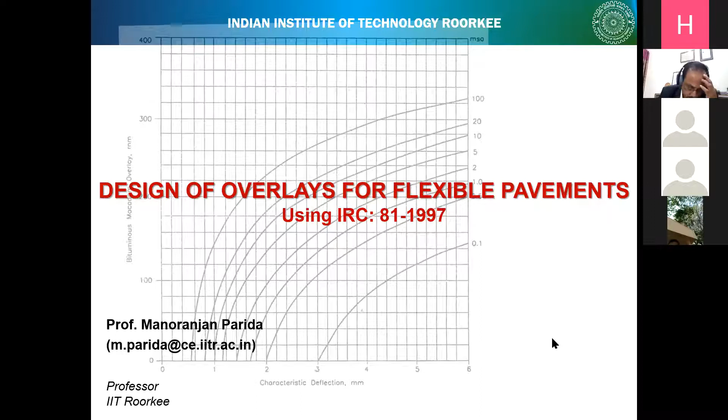The title of this presentation is Design of Overlays for Flexible Pavements, using IRC 81 1997. This is also known as the Benkelman beam deflection test. Other than Benkelman beam, you can use a falling weight deflectometer, but my lecture is not going to cover that - I'm just going to cover the Benkelman beam deflection based overlay design. I have one small case study from Noida, a project where the basic emphasis was on a BBD test. I'll be explaining the details of that particular case study.

Maybe in the audience you are already familiar with this particular nomogram or chart. In the IRC document, you can see these nomograms, and they were very useful before the computer was in use, before the mobile was used. It's a very simplistic representation and a very handy tool for field engineers.

This one is primarily the overlay thickness design curve, which is there in IRC 81 1997. Here you can see, let me explain - on the x-axis you have characteristic deflection, the unit is in millimeter, and you have different curves. These different curves correspond to different million standard axles.

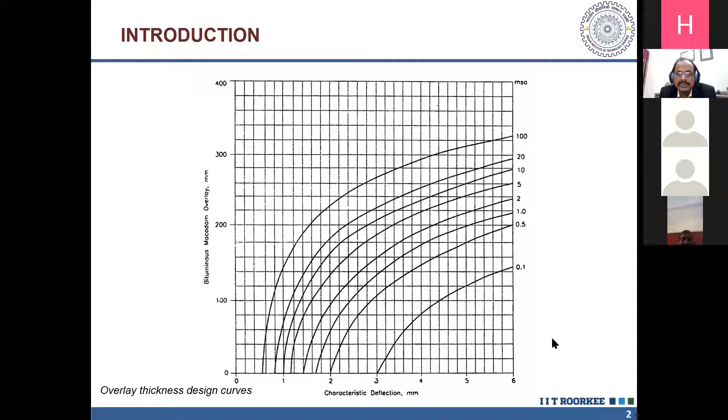The first curve at the lowest portion is for a standard million axle of 0.1, and the last one is for 100 MSA, 100 million standard axles. The most critical part is the y-axis, which is the outcome of the entire exercise.

It is the bituminous macadam overlay in millimeter. All our bituminous roads or any kind of road network will require periodic maintenance. After a certain period of time, depending on their structural health, there is a need for strengthening. Especially for bituminous pavements, the strengthening is determined on the basis of their current strength, using pavement evaluation techniques. Benkelman beam deflection is a very simplified technique, and in this curve you get the characteristic deflection from the Benkelman beam deflection test.

Million standard axles are calculated on the basis of traffic data and axle load spectrum. Finally, what the field engineer is interested in is the thickness of overlay. The output here is available in terms of bituminous macadam, although in real life it could be DBM or STBC, so it has to be converted into equivalent layers of wearing course, for which the conversion is available in this particular code.

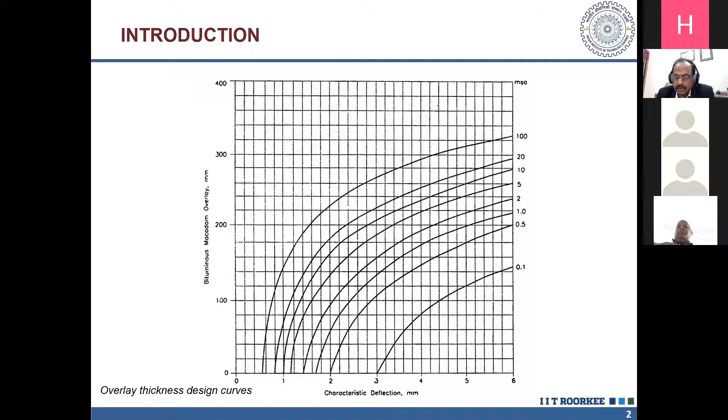So that is briefly what we do in the process of the design of overlays using IRC 81.

If this represents the different layers of your flexible pavement, you start with the subgrade, then an existing pavement, and depending on its functional and structural condition, it will require some sort of overlay. Right now we are looking at the Benkelman beam deflection test and how we can determine the quantum of overlay.

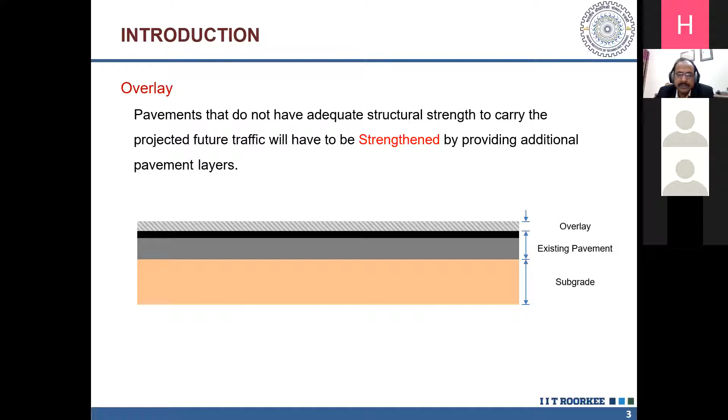In fact, the method provides the optimal requirement. Many city authorities would like to make a provision for the next 5 years, some for the next 10 years. Especially in the case of Delhi, the major overlays were done in 2010 to 2012, immediately after the Commonwealth Games. Currently, almost after 8 years, they are again looking at understanding the current condition of the pavement, resorting to this Benkelman beam deflection test, and on that basis determining what overlay needs to be provided on these flexible, bituminous pavements.

This is the document IRC 81 1997. Many of you must be familiar with this particular document, guidelines for strengthening of flexible road pavements using the Benkelman beam deflection technique. If you are following any textbook, the book by Professor Khanna, Justo, and Professor Veeraraghavan has a chapter on the design of overlays for flexible pavement, which is largely confined to this IRC 81 1997.

Especially if you are designing a flexible pavement, IRC 37 2018 is relevant. As part of this faculty development program under this AICTE Training and Learning Academy, you have attended many lectures, and I think there must have been reference to IRC 37, which is used for the design of flexible pavement.

You have another IRC code, IRC 115, the guidelines for structural evaluation and strengthening of flexible road pavement using a falling weight deflectometer, which is also in practice, although FWD is quite popular for evaluation of airfield pavements.

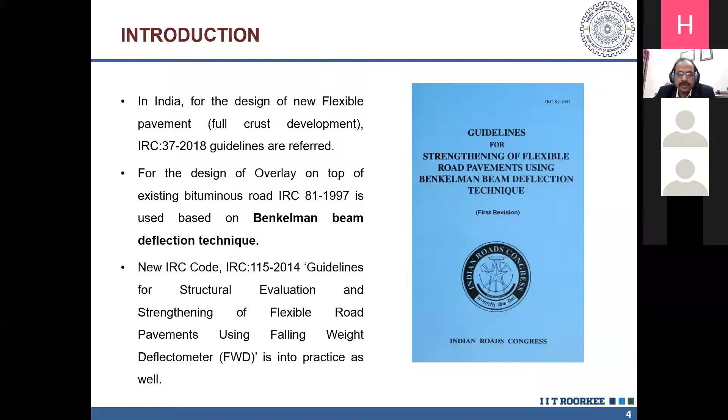In FWD, you have two variants: one is a lightweight falling weight deflectometer, and the other is vehicle mounted. The lightweight falling weight deflectometer is portable, you can carry it and move from one place to another. There have been instances of usage of both, but currently FWD is seen more and more, especially for high volume networks like 4-lane, 6-lane divided national highway networks and expressways. Slowly, people are moving towards falling weight deflectometer based pavement evaluation and design of overlays.

While you design these overlays, these are the basic steps. First, you need to select a design period, I'll come back to this later. Then you need to project the commercial traffic, that is the number of commercial vehicles per day for the design period. Then you have to estimate cumulative standard axle load repetitions for the design period, which could be 5 years or 10 years.

Depending on the design period, you need to project your traffic and convert it into million standard axles, which is possible on the basis of an axle load spectrum study. This particular term is known as NS, and many of us might be familiar with the term MSA, million standard axles. Then there's selection of characteristic rebound deflection, DC, for the existing pavement.

The DC value is obtained from the Benkelman beam test, and then you use the overlay design curve which we discussed. Once you have the NS value and the DC value, you can determine the overlay thickness requirement.

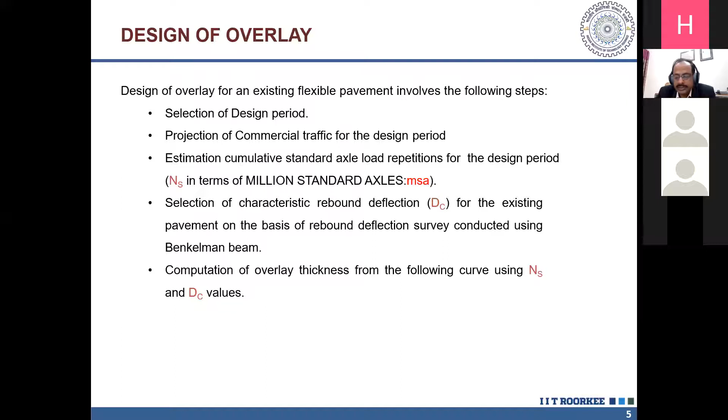This is basically a graphical presentation of design of overlays. Here there are two different verticals. The first vertical is primarily the pavement evaluation, involving field surveys using Benkelman beam apparatus for deflection measurement. The testing protocol is defined in IRC 81 1997.

You have to compute the rebound deflection, this is capital D in millimeter. Then depending on the temperature of measurement, you apply the temperature correction, depending on rainfall and soil conditions you apply the seasonal variation correction. On the left side, you go through the pavement evaluation and the outcome is the DC, the characteristic deflection.

On the right hand side, the basic effort is towards calculating the cumulative standard axle load, NS, most popularly known as MSA. The unit of NS is a million standard axle.

First you need to choose a period of traffic for the design period. It's a matter of economy, a matter of funds available with the particular agency. Some city roads would like to go for 5 years, some would like to go for 10 years.

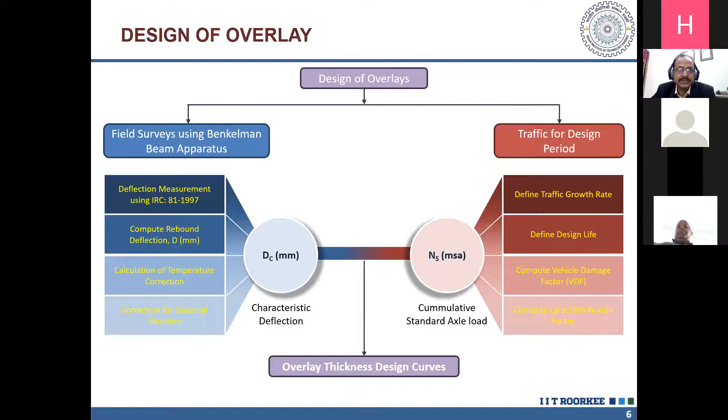So here are some more estimations, some details of the traffic parameters. The projection here is going to be of the commercial vehicle, and commercial vehicle is defined as that particular vehicle which has a laden weight of 3 tons or more.

Then the traffic is considered in both directions in case of 2-lane roads, and in the direction of heavier traffic in case of multi-lane divided facilities. For urban roads, a 3 day count is sufficient. Normally you go for 3 days weekday traffic count and take its average, or generate the commercial vehicles per day for the 3 days average.

For non-urban national highways and expressways, you need to go for a 7 days, 24 hours classified count. From that, the design parameter which is extracted is commercial vehicles per day.

Coming back to traffic growth rate, for a regional network, traffic growth rate is straightforward. But for urban roads, what is going to be the traffic growth rate is a big question, because for a limited overlay study, it's not possible to carry out simulation or undertake any 4-stage comprehensive traffic transport planning. If you have some past data or past trend, that is going to be useful. But invariably for urban road networks, it's very difficult to have access to past disaggregate traffic data on the basis of which it's possible to make projections.

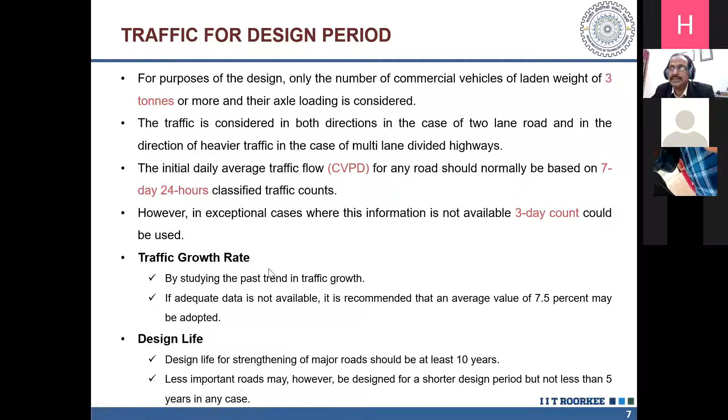Then a small comment on design life. As I suggested, it's a good idea, especially when developing a maintenance study, to develop two perspectives: projections for 5 years and projections for 10 years. Depending on the budget and availability of funds, the particular agency can decide which is the best way to go.

Now, for the calculation of vehicle damage factor, you need axle load data - the weight of all the individual axles of the commercial vehicle. The damaging effect is governed by the fourth power law: actual weight of the axle divided by standard weight of the axle, to the power 4. So this fourth power law governs the calculation of vehicle damage factor.

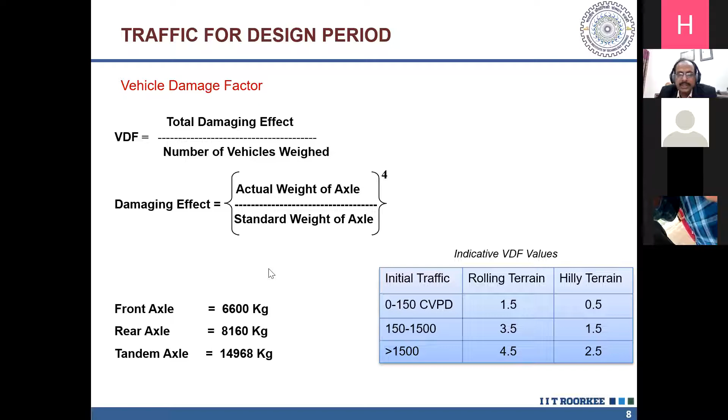Depending on the initial traffic value, the VDF values are available in IRC 81, depending on the different ranges of commercial vehicles per day. The initial range is 0 to 150 CVPD, then next is 150 to 1500, and more than 1500. These values are available in IRC 81. So if you are not doing any axle load spectrum study, you can use these default values available in the IRC code.

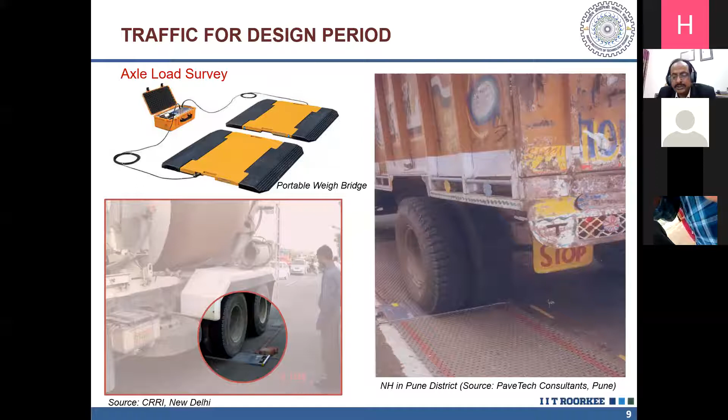I have taken these pictures from Central Road Research Institute. CRRI has been very active with respect to different pavement evaluation technique studies, and they also undertake a lot of axle load spectrum studies. On the right hand side, you can see the study going on in a National Highway in Pune district - this one is from PaveTech Consultants, Pune.

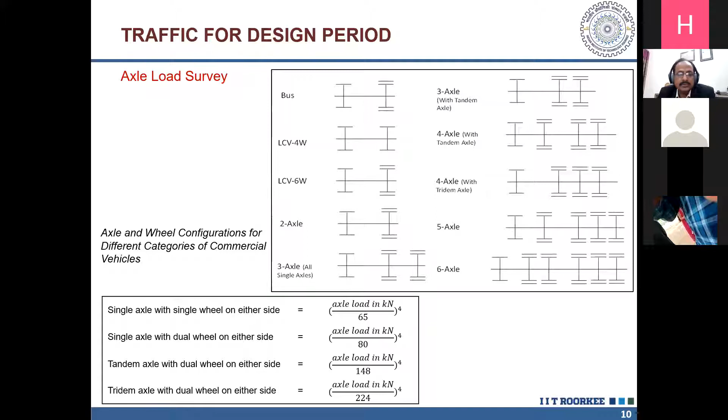Then these could be different possible configurations of the axle loads for different kinds of vehicles. How do you calculate this? It will all depend on what is the permissible axle load, and on the basis of that, the vehicle damage factors can be calculated.

One very important traffic parameter for these overlay design studies is the lane distribution factor. The lane distribution factor depends on what kind of road it is - single lane road, 2-lane single carriageway road, 4-lane single carriageway road, and dual carriageway roads. For all these, the lane distribution factors are available, which go into the calculation of million standard axles.

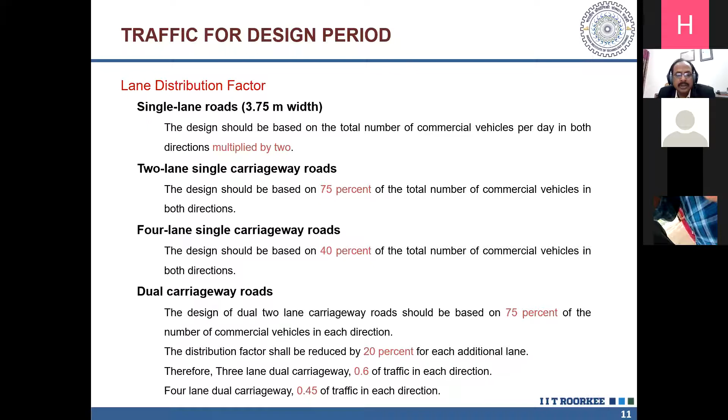Now, NS, the design traffic for the design year, is calculated in this way, which is very similar to the calculation with respect to NS in IRC 37. So NS is the cumulative standard axles to be catered for in the design. Here, capital A is the initial traffic after completion of construction, in terms of commercial vehicles per day.

So it takes into account all the commercial vehicles. It excludes definitely cars and other non-commercial vehicles. So R is equal to annual growth rate of commercial traffic for that particular stretch of the road or for the particular area where you are going to undertake this study. N is equal to the design life in years.

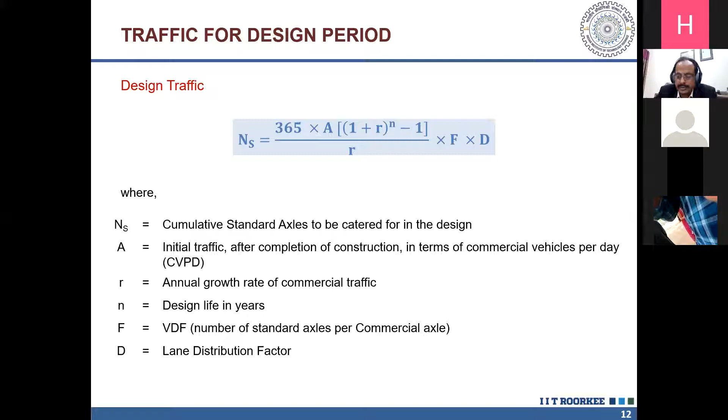There are options that normally either you can do it for 5 years or 10 years. Capital F is the vehicle damage factor. If you have an axle load spectrum study, from that you can actually calculate F, or otherwise you can take the default value of F from the IRC 81. Capital D is the lane distribution factor, so depending on the geometry or configuration of the particular network, you can use the value of D.

Now we look at IRC 81 1997, which defines the test procedure. Basically it's known as pavement condition survey. This survey usually precedes the actual deflection measurement, which consists primarily of visual observations and rut depth measurement. You have a straight edge by which you can measure the rut depth. Based on these, the road length shall be classified into sections of equal performance, preferably of minimum 1 kilometer length section. So the entire study network has to be divided into homogeneous sections.

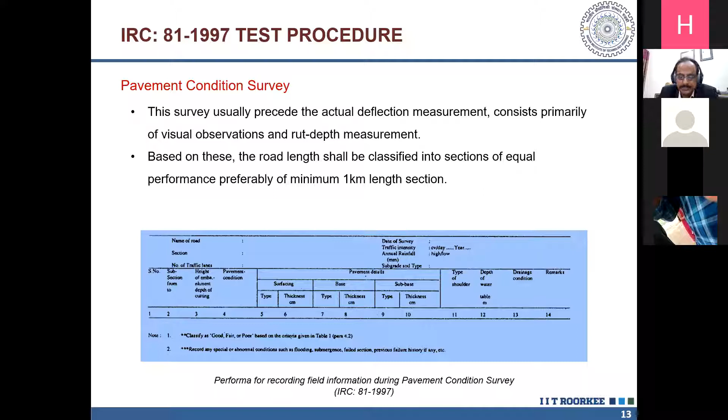So now Benkelman beam as an equipment, the different geometry and all these details are provided. And normally if you're purchasing a Benkelman beam, you get a standard Benkelman beam with all the above geometry. Then the particular truck, in fact, you require a loaded truck for a Benkelman beam. So the rear axle load is going to be 8170 kg, and you need to maintain a tire pressure of 5.6 kg per centimeter square.

In terms of tolerance, for the load you have plus or minus 1%, and tire pressure plus or minus 5%. So you need to also have a tire pressure measuring device and a thermometer which can measure the pavement temperature 0 to 100 degrees centigrade. You need a mandrel for making a hole in the pavement to measure temperature, and you need to reach a depth of 4.5 centimeter. The top dia is 1.25 centimeter and bottom dia is 1 centimeter. You apply glycerin, and through glycerin you can measure the temperature of the pavement. So this is essentially for applying the temperature correction.

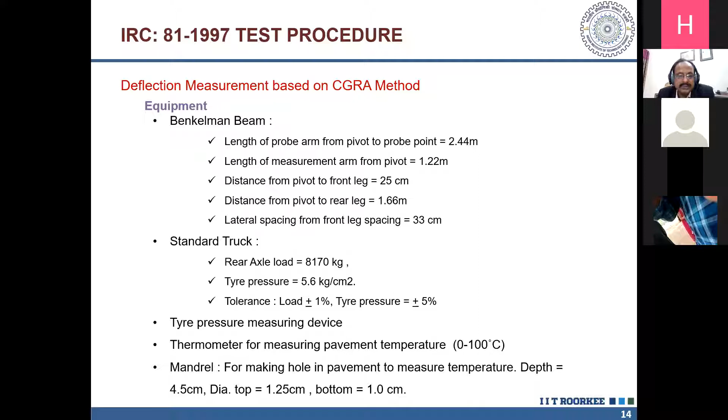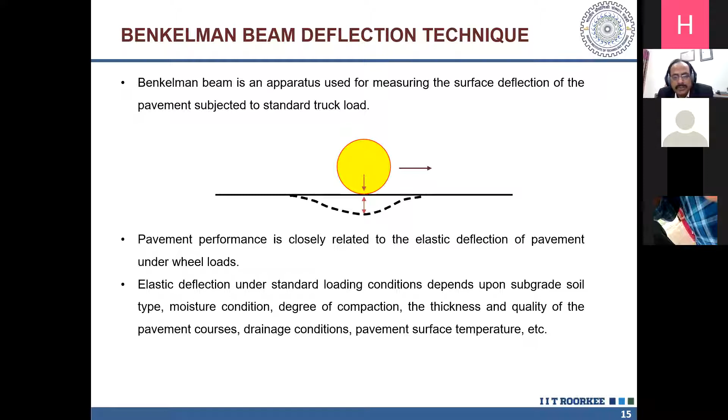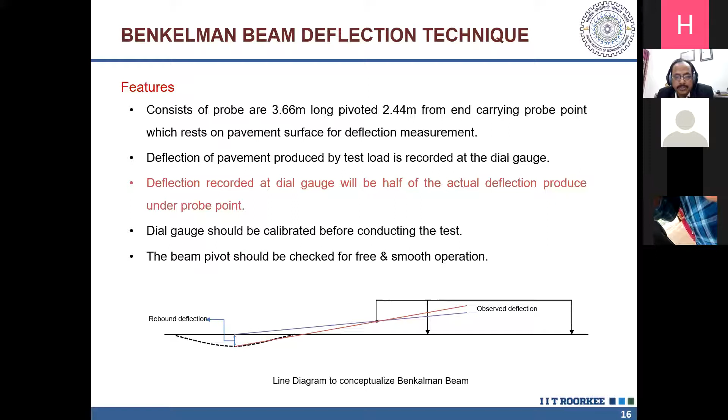The Benkelman beam apparatus is used for measuring the surface deflection. You have a loaded truck and you will be placing the beam behind the loaded truck. We believe that because of the loaded truck, because of the axle, there is going to be a deflection, and once the truck moves away, the pavement is going to bounce back. So in this Benkelman beam, you are going to measure 3 sets of readings, which are essentially the rebound deflections.

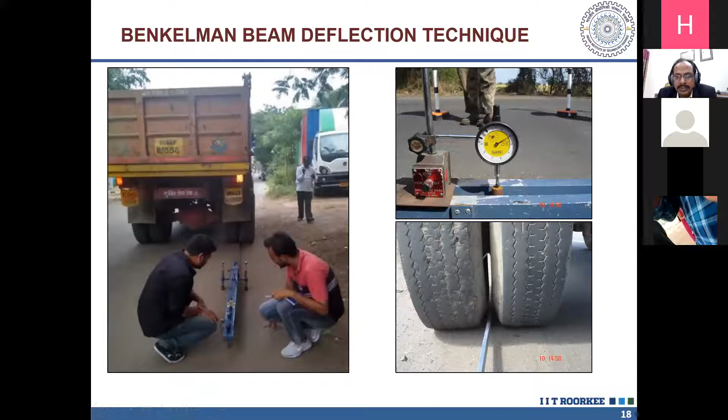Now these are a couple of photographs showing how the Benkelman beam is placed between a pair of tires. Here you can see the probe of the Benkelman beam, which is inserted between a pair of tires.

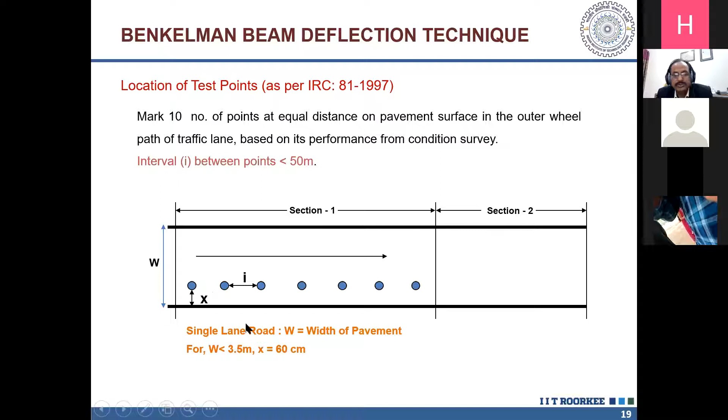So one aspect is how to mark these points in the longitudinal direction. The other is the location of these test points from the edge. Here, capital W is the width of the carriageway, and X is the location of the point with respect to the outer edge. If it's a single lane road, X is equal to 60 centimeters. Depending on the lane configuration, the value of X will change.

For a 2-lane road with W more than 3.5 meters, X is equal to 90 centimeters. These points in the longitudinal direction will have a lateral separation of 90 centimeters from the edge of the pavement.

For a 4-lane divided road, the location of these points is X equal to 150 centimeters. Looking at the diagram, it's a 4-lane divided facility, and you can see that these test points in the two adjoining lanes are staggered - they do not fall in one line. The point in the inner lane is exactly at the center with respect to the two consecutive points in the outer lane. So these test points need to be located in a very staggered manner if it's a divided facility.

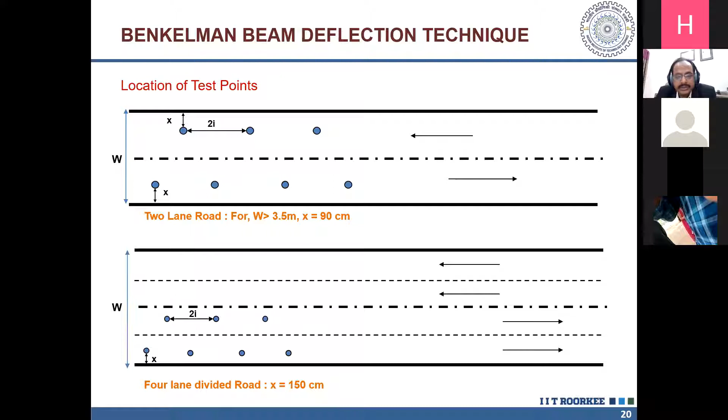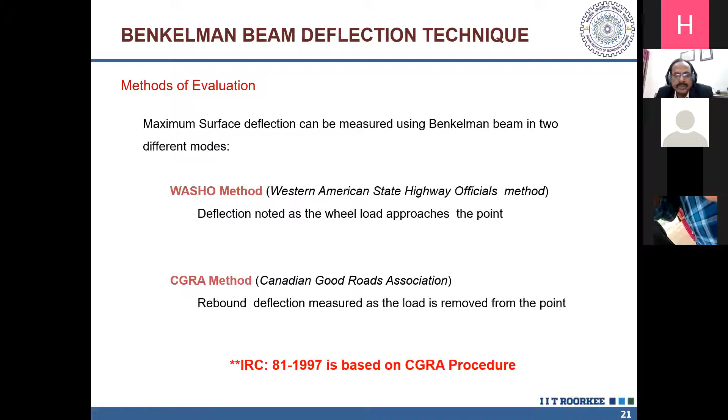There are two methods of pavement evaluation with respect to design of overlays. One is the WASHO method - Western Association of State Highway Officials method. The other is the CGRA method - Canadian Good Roads Association method - and IRC 81 has adopted the CGRA procedure.

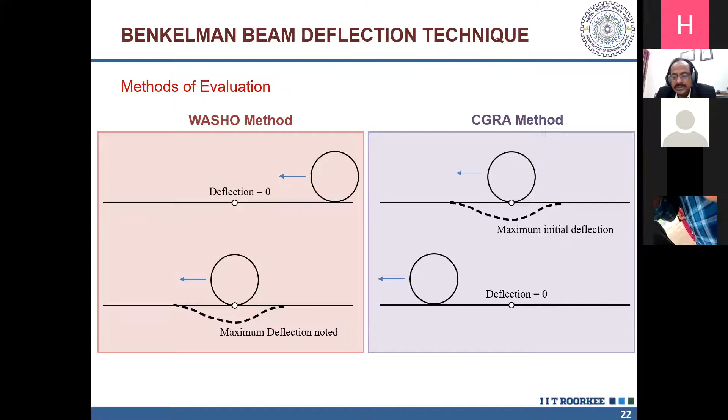In both methods, what differs is the movement of the trucks. In the CGRA method adopted by IRC, the truck moves ahead and you take 3 readings. First, over the test point with the rear wheel, that is the initial deflection. Then the truck moves a distance of 2.7 meters from the initial position - that's the second reading. Then it moves 9 meters away from the original position - that's the final deflection. So you have 3 sets of deflection, and by using these, one calculates the characteristic deflection.

As a procedure, it is very clearly documented. The point on the pavement to be tested is selected and marked as discussed previously. It is very important how you pick these test locations - whether it's a divided facility, an undivided facility, single lane, or 2-lane road. IRC 81 provides the details for marking these test points.

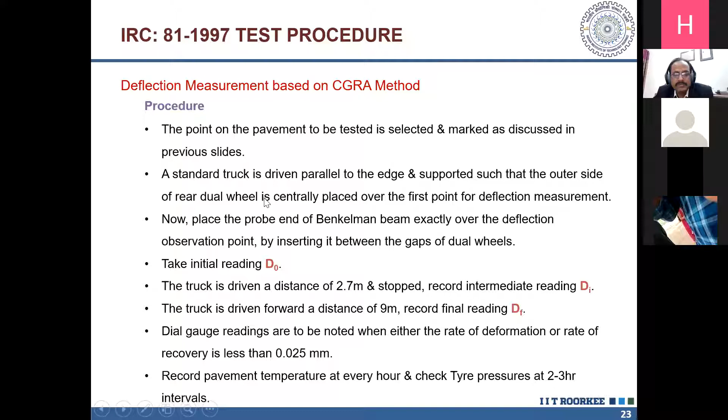Then you need to bring a standard truck, which is driven parallel to the edge and positioned such that the outer side of the rear dual wheel is centrally placed over the first point for deflection measurement. You get 3 sets of deflection: initial is D0, and once the truck is driven a distance of 2.7 meters, you get reading DI, and after it has moved 9 meters, you get the final reading DF. These are obtained from the dial gauge. You also need to record pavement temperature every hour and check tire pressure at 2 to 3 hour intervals.

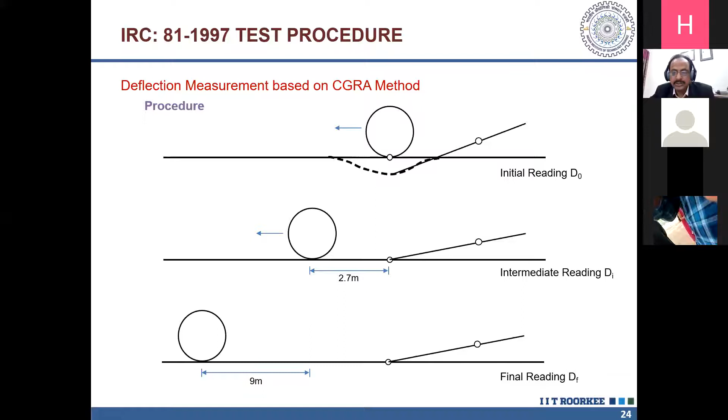So this is basically a schematic representation. You can see the first configuration is with respect to initial reading D0. Once the rear wheel has moved a distance of 2.7 meter away from the original position, you get intermediate reading DI, and after this rear wheel has moved a distance of say next 9 meters, you get the final reading of DF. So these three deflection values are going to be useful for calculating the characteristic deflection.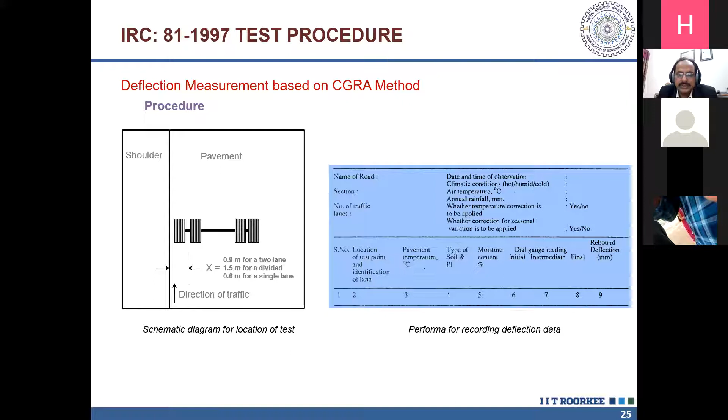Now these are the calculations on the basis of Canadian Good Roads Association method. First you check the difference between DF minus DI - that's the difference between the final deflection and the initial deflection. So the first condition: if DF minus DI is less than or equal to 0.025 mm, then the rebound deflection is calculated in this way - Capital D is equal to twice DF minus D0.

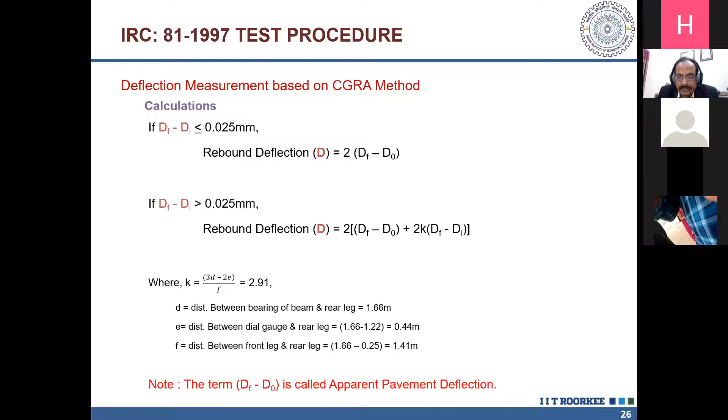If DF minus DI is greater than 0.025, you calculate the rebound deflection by the second equation, where you have one more parameter, K. K is equal to 2.91. It essentially depends on the geometric configuration of the Benkelman beam, which is used with the standardized Benkelman beam recommended in IRC 81. K is equal to 2.91. And this term DF minus D0 is the apparent pavement deflection.

Now, correction for temperature variation. The default temperature is 35 degrees centigrade, and anything over or less than this requires temperature correction. So if the deflection measurements are taken at any temperature other than 35 degrees centigrade, the deflection values are corrected using a correction factor of 0.01 millimeter per degree centigrade. The correction is positive for pavement temperature lower than 35 degrees and negative for pavement temperature higher than 35 degrees. Like here, if your recorded temperature is 37 degrees, the correction is going to be negative in this case: 35 minus 37 into 0.01, that is minus 0.02 mm.

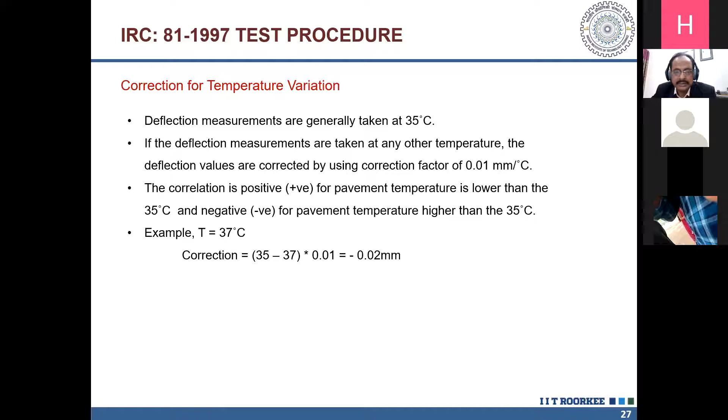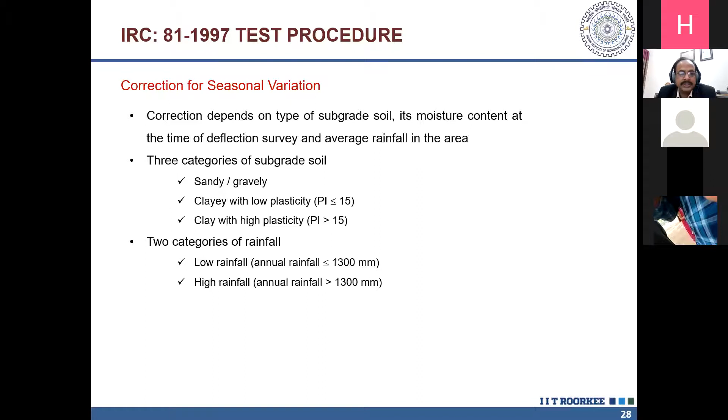Then you have corrections for seasonal variation. You need to identify the type of subgrade soil - there are three categories of soils - and the type of rainfall data. On the basis of that, you have these six charts given in IRC 81 for the seasonal variation.

Now you'll calculate the characteristic deflection. So here you can see that you have calculated D, the rebound deflection, apply the temperature correction, which is plus or minus, and the seasonal correction factor, which is in a multiplicative format. That gives you the corrected deflection value.

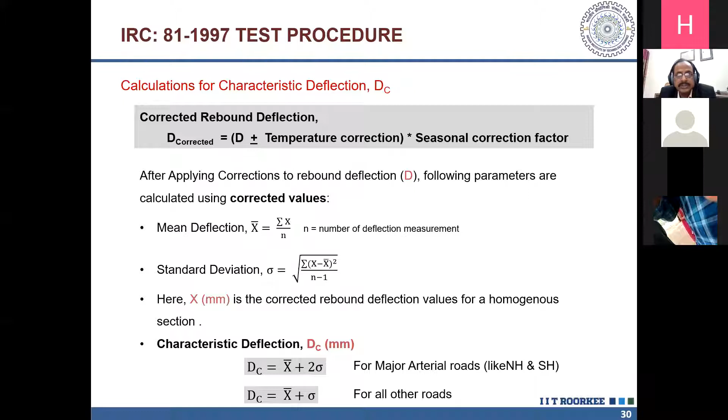Now you need to carry out very simple statistics. You find out the mean deflection, you find out the standard deviation, and then using the mean and standard deviation, it's possible to find the characteristic deflection DC. So characteristic deflection DC is equal to mean plus twice sigma for major arterial roads like National Highways and SH, and characteristic deflection is mean plus 1 standard deviation for all other roads.

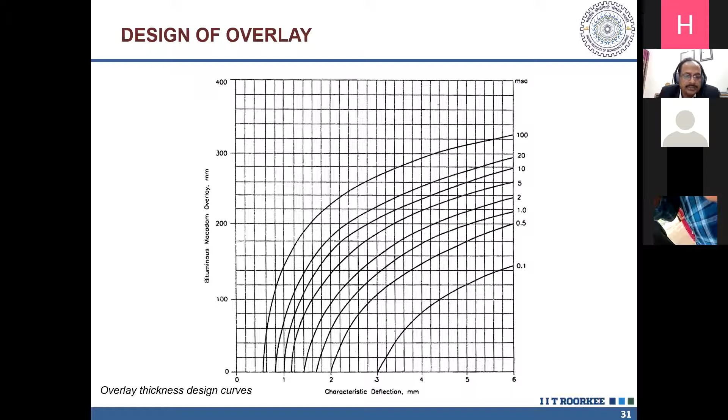So that's how we are again back to this particular overlay design curve, and you can find out the characteristic deflection, which is an input on the x-axis. Then you have calculated MSA, the million standard axles. With this, it is possible to determine the thickness of the overlays in terms of BM layer in millimeter.

So this is the finishing point of design of the overlays. This particular chart, as I said, these design charts are very, very handy with field engineers. They are also known as nomograms. And as I said before, you had the mobile apps or simple devices, but these charts were the most elementary devices and very handy for field professionals.

Then like in real life, your top layer is not going to be in terms of bituminous macadam. It could be like SDC, semi-dense concrete. It could be DBM, it could be asphaltic concrete. So then we need to go in terms of equivalence of different layer materials. Here you can see that 1 centimeter of BM is equal to 1.5 centimeter of WBM or WMM or BUSG. Then 1 centimeter of BM in terms of the surface layer is 0.7 centimeter of DBM or asphaltic concrete or semi-dense concrete. So it is possible to convert the BM into the desired layer through which you would like to undertake the overlays.

And the recommended minimum thickness of overlay is equal to 50 mm BM with additional surfacing course of 50 mm DBM or 40 mm BC.

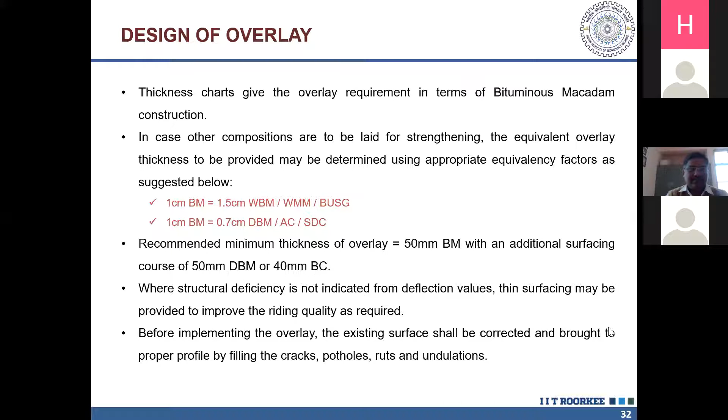Now I'll move to the next part. Okay, so I hope you can see my screen. Is my screen visible? Slide 32. Yes, sir, yes sir, it is visible.

Okay, yeah, so the next part is basically one small example. I know it's very straightforward, not very difficult. So this is a small numerical problem. Since we have many faculty members who need to teach it in class, from that particular perspective I have tried to bring in this small numerical.

This is a 2-lane undivided national highway. Subgrade is sandy soil, and annual rainfall is less than 1300 millimeters. Existing traffic, design period, traffic growth, vehicle damage factor, then pavement temperature during deflection measurement, and then the single readings of dial gauge, all these inputs are available, and there are 11 sets of data points.

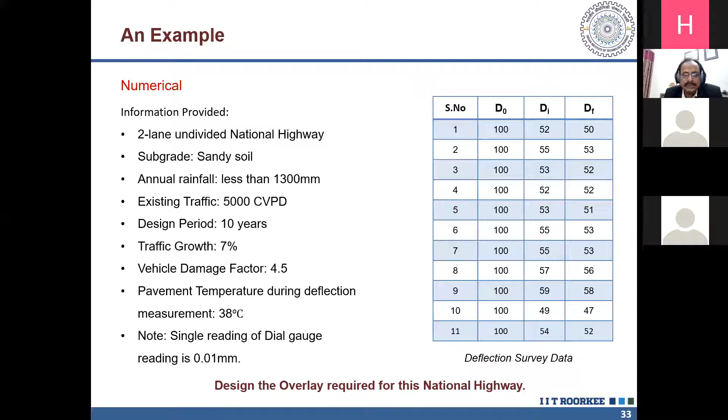D0, then intermediate deflection and final deflection - D0 is the starting deflection. So for all 11 data points, these deflections are available. Now if they are tabulated, it looks like this. So you can calculate DI minus DF, then D0 minus DF, and you can calculate the value of D.

Then you need to apply temperature correction, then seasonal correction. You have to calculate corrected deflection. Then from corrected deflection, you can calculate the mean value, standard deviation of the deflection, and then you can calculate DC. And when you calculate D, you need to check different logical checks which were given in this presentation.

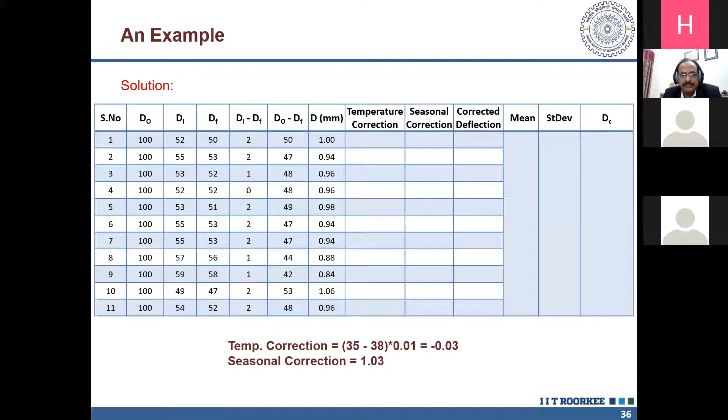So you can see the temperature corrections - because the temperature is higher, it's going to be a negative correction. Seasonal correction is going to be multiplicative, this is 1.03. And now the corrected deflection looks like this, from which you can calculate the mean value, the standard deviation, and the characteristic deflection.

In this case, being a national highway, it's going to be x-bar plus twice sigma. So it is 1.067 millimeter.

The second part is calculation of NS, cumulative number of standard axles. So all the inputs like initial commercial vehicle per day, growth rate 0.07, design life of 10 years, vehicle damage factor of 4.5, and lane distribution factor to be taken in this case is 0.75. So NS comes to be 85.1 MSA.

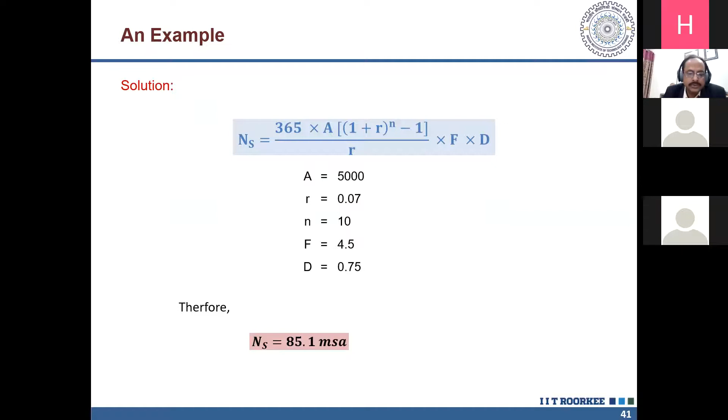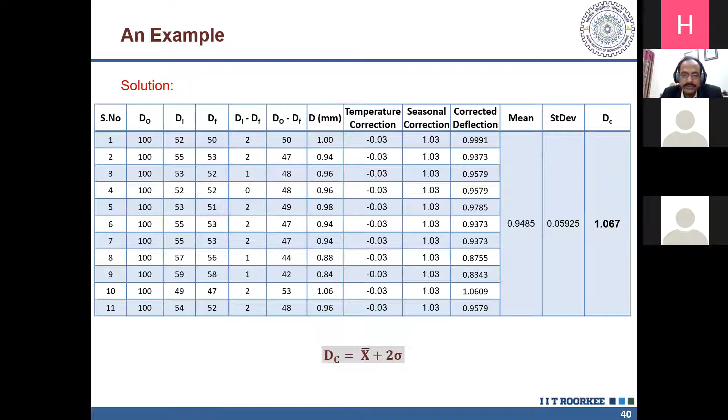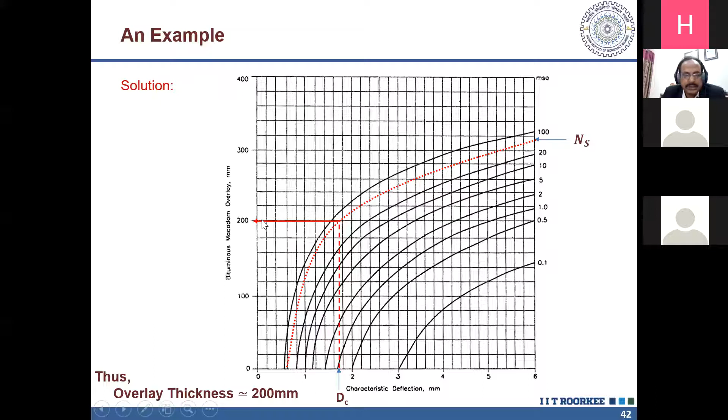So this is the value with respect to 1.067, and then you need to draw a curve because you don't have a curve corresponding to 85 MSA. So you need to interpolate the curve in between 20 and 100. On the basis of that, now you get the thickness of overlay as 200 millimeter of BM.

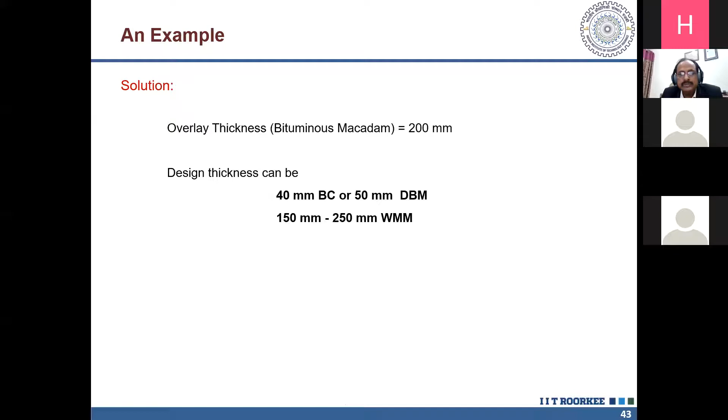So this 200 millimeter of bituminous macadam can be split into parts, like if you are providing 50 mm of DBM, 40 mm BC, or 50 mm DBM, then 150 mm to 250 mm WMM. So in terms of these two layers, this 200 mm thickness of bituminous macadam is going to be provided.

I'll be moving to the next PPT, so just allow me a little break. Sure, sir.

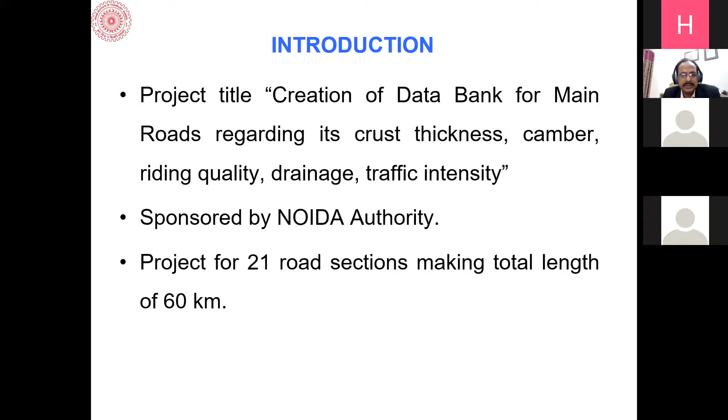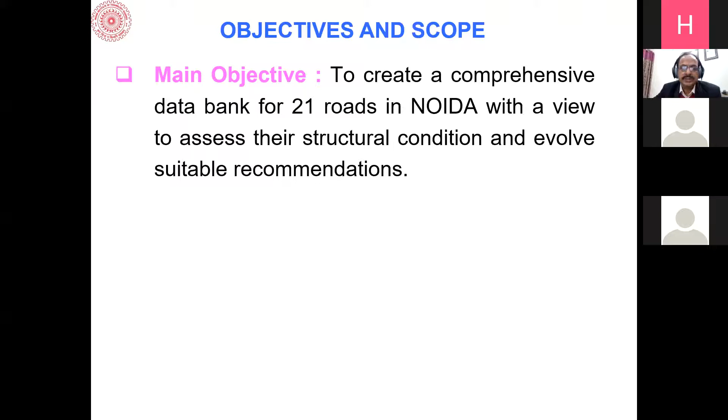So this is the title of the project: creation of a data bank for main roads regarding the pavement crust thickness, camber, riding quality, drainage, and traffic intensity. There were 21 road sections making a total length of 60 kilometers. One of the ideas was to assess the structural conditions of the pavements and make suitable recommendations.

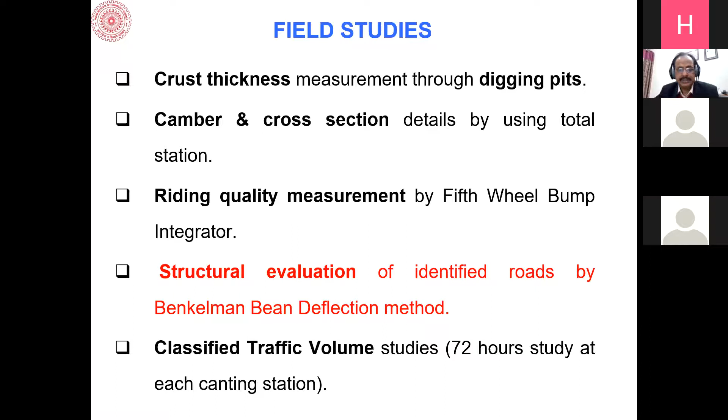The crust thickness was measured through digging pits only, making it possible to understand the configuration of different layers through these test pits. Camber and cross-section details were collected through total station, and riding quality was measured by bump integrator. Structural evaluation of these roads was carried out by Benkelman beam deflection test. Traffic volume studies were carried out for 72 hours at each of the counting locations.

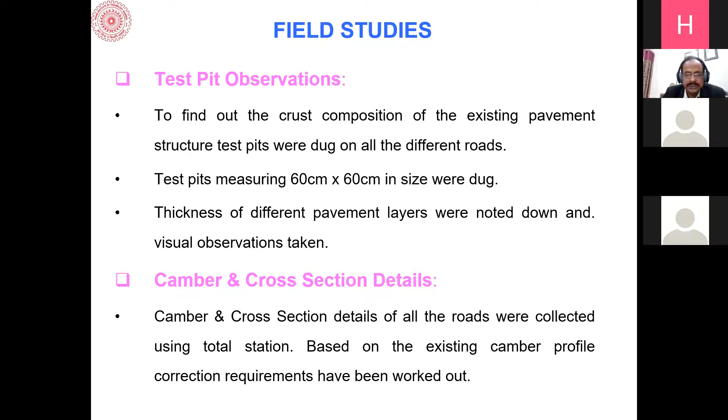Now these are the details of the test pit. The test pit is in fact very useful sometimes to understand the thickness of different layers. Camber and cross sections, as we said, were collected using total stations. You can see digging of the test pit in progress, measuring the layer thickness.

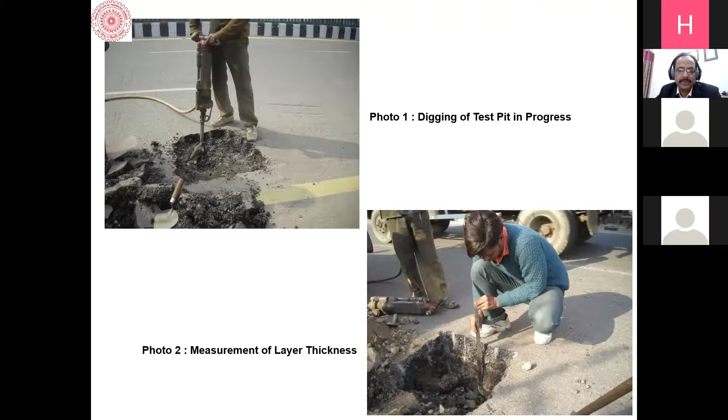In urban roads, sometimes you see that the thickness of the bituminous layer is very significant. Maybe there isn't a requirement for any additional bituminous layer, things which can be managed easily by thin surfacing, but still people would like to go for very rich bituminous layers even though there is no need for the same.

These are photographs for collection of soil samples for CBR test. Then through total stations, the study is going on.

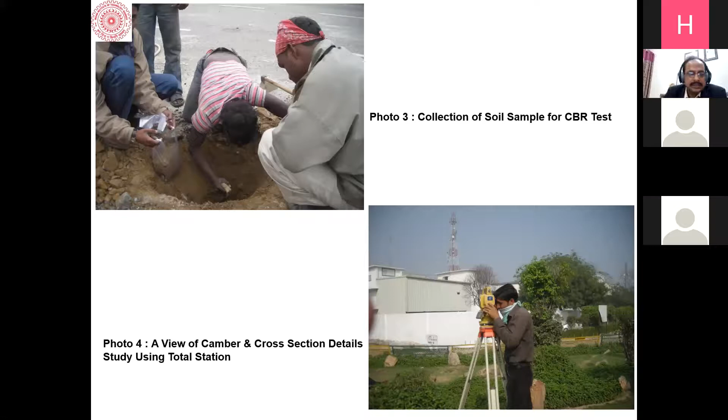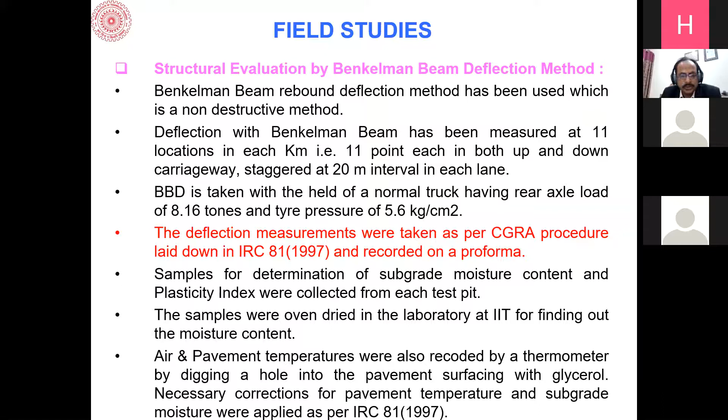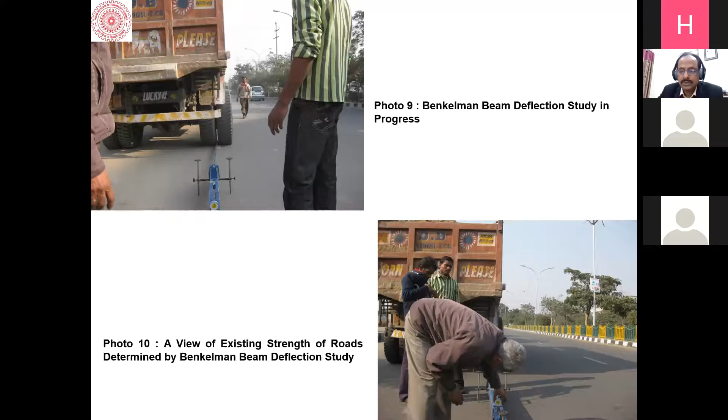So we have already discussed the Benkelman beam deflection test, I am not going to repeat it. The deflection measurements were taken as per CGRA procedure, which is documented in IRC 81. This is the Benkelman beam study taking place, especially in urban roads. If you look at the street lights while doing this study, invariably they are equally spaced at an interval of 30 meters, so that spacing is very handy.

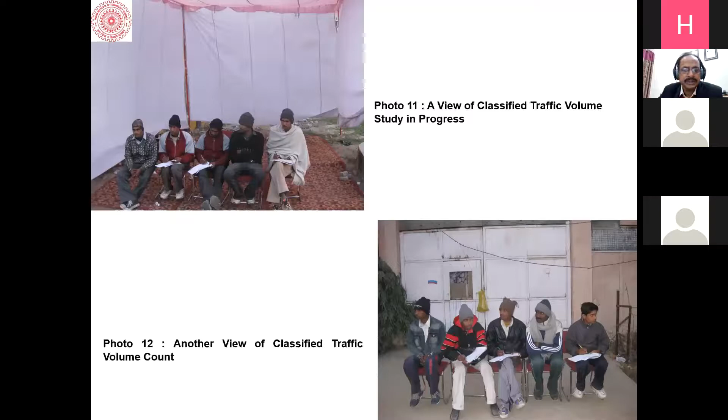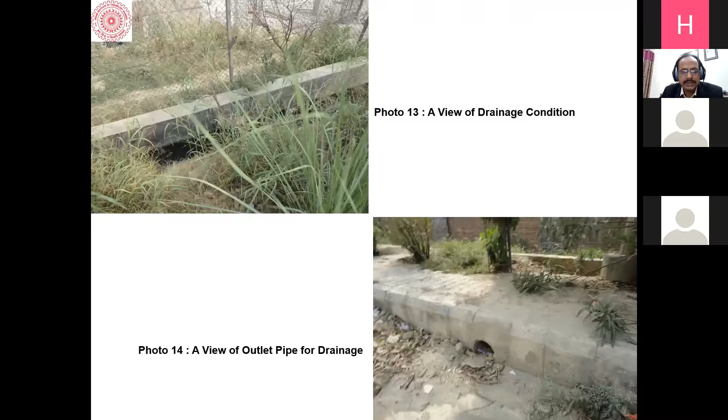Then for all 21 road sections, we undertook a 72-hour count at each location. These were manual studies done at that point of time. Drainage was also included as part of this project, so the conditions of the existing drainage facilities were understood.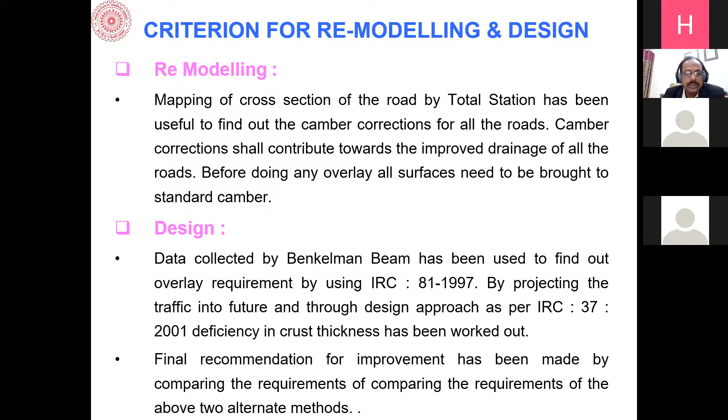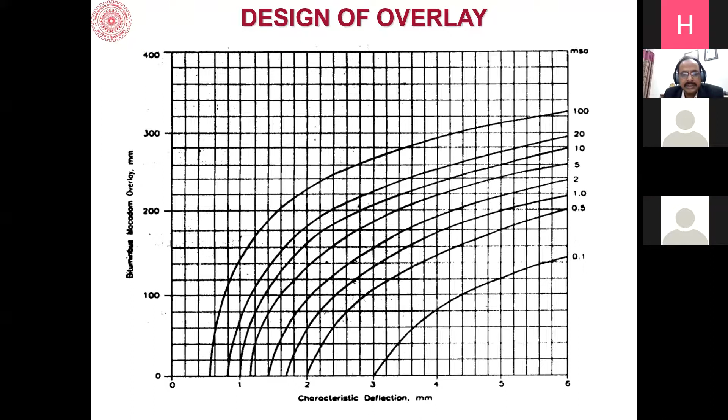On the basis of the road cross sections, it was felt that some sections had undulations, making it essential to undertake level corrections. So for those roads, level corrections have been recommended. Then, on the basis of the Benkelman beam deflection test and using these design curves, for all 21 roads, the proposed improvement after profile corrections has been recommended.

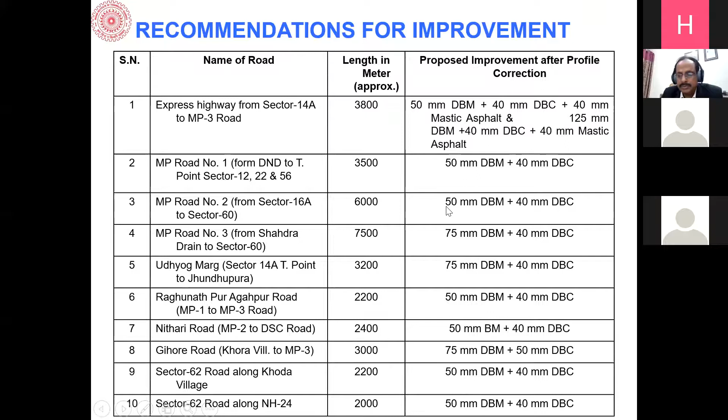These are the name of the road in the second column, then the length in meters, approximate length. On the basis of Benkelman beam deflection, the maintenance recommendations vary from road to road—road number 2 is 50mm DBM plus 40mm DBC, road number 3 is 50mm DBM plus 40mm DBC. So for all 21 road networks, it was possible to work out the overlay thickness.

In fact, these overlays were undertaken almost immediately after the study. So I can say that Benkelman beam is a very simplified method, and for at least the last 40 years it has been used profusely for both non-urban and urban areas. Since 2000 to 2020, we have undertaken a lot of studies on urban roads in Delhi. Field engineers are quite comfortable with it, it's very easy to implement, and it provides a very optimal recommendation with respect to the overlays which need to be provided.

Having said that, there are good reasons to move towards more technology-intensive methods. FWD is one which falls into that category and can provide information on the existing health of the pavement in a much better way. So any recommendation worked out on the basis of such rational evaluation and design will result in very economic recommendations for strengthening flexible pavements. With that, Ankit, I would like to close.

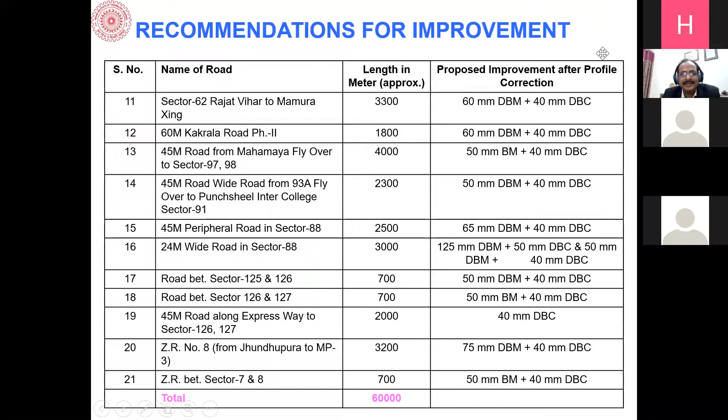And he says, if so, how do we find the thickness of the CC overlay? I would say it is possible, though there are not too many instances where somebody would go for a cement concrete overlay. It will depend on determination of the K value. If you can determine the K value, you can design the thickness of the cement concrete overlay. But I have seen normally the situation is contrary - many airfield pavements which are cement concrete pavements are going for bituminous overlays. At least in the last decade, a number of airports, including Bagdogra Airport, and a lot of military airports, have moved from cement concrete overlay to flexible, bituminous overlays.